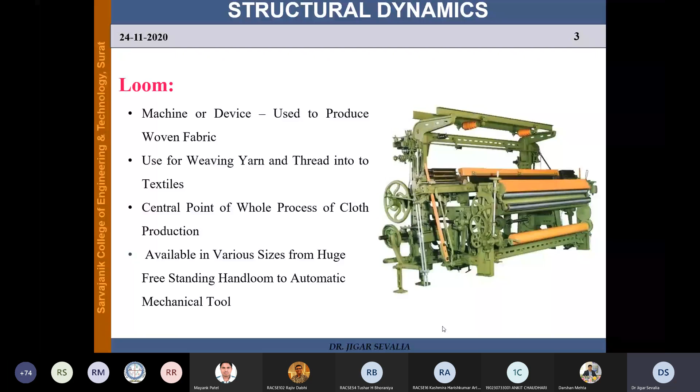It is available in various sizes, right from freestanding handloom to automatic mechanical tools. We have also seen handloom—all of you might have come across this handloom machine and automatic machine. As we are in Surat city, we are very much fortunate to have exposure to these machines. So when we talk of classification of loom, there are broadly two categories: handloom and power loom. We are mostly concerned about power loom because it is high speed machinery, so it creates more effect on the building in terms of vibration.

Going further in depth, handloom includes the vertical loom, pit loom, frame loom, chitranjan loom—these are the different categories of handloom. Power loom—conventional power loom—was very much common before. Right now also it is very much common, but people are now opting more for water jet machines and rapier machines, creating different types of...

So this conventional power loom machine we also come across in Surat city, and nowadays the proportion of water jet machines and rapier machines is also increasing a lot. So this is about classification of loom machines.

Now when we talk of dynamic analysis of the looms industry, structural analysis always considers two aspects: static component and dynamic component. In the static component, everything is steady state of load, gradually applied load, and it is not time dependent. So that is the static component—steady load, steady state of load, or gradually varying load, not time dependent. But when we talk of the dynamic component, it involves the motion of the particle, suddenly applied load, and it is time dependent. So we consider this component when we are talking of dynamic analysis of the looms industry.

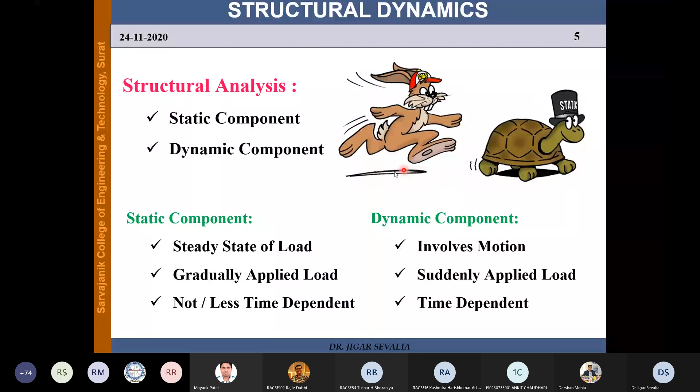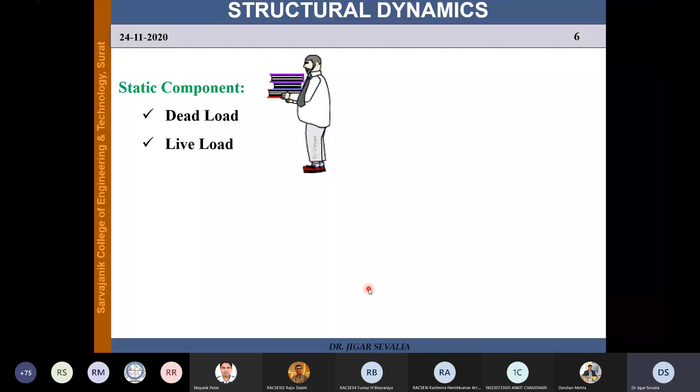So the static component will consider only dead load and live load, and it is very well mentioned in IS 875—dead load and live load—you can calculate from the available latest IS code, IS 875. The dynamic component involves motion, suddenly applied load, and machine vibrations like earthquake load, wind load, and blast loading. When we consider all this loading, we have to go for dynamic analysis. So that is about static and dynamic analysis.

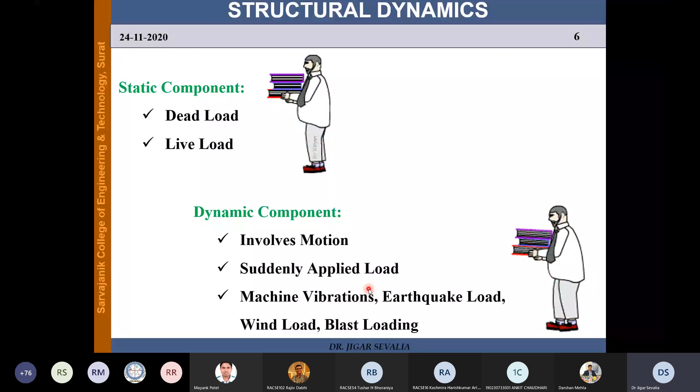And when we talk of structural response, what do we consider? Deformation behavior of the structure subjected to particular loading. I have experienced many times when visiting looms industries—you will feel vibrations.

When you are sitting on the chair, you can feel in a particular direction at a particular time you are getting certain vibrations. Even boxes which are there in the industry, you can see vibrating because it is the highest vibration creating machine in the textile industry.

So dynamic component, when we consider displacement, rotation, velocity, and acceleration, we are very much concerned about the acceleration part of the building, velocity, rotations, and displacement. These are the dynamic responses of the structure we are supposed to study while doing the analysis.

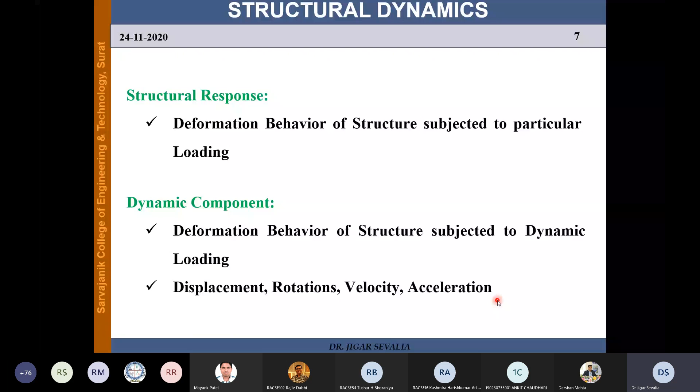So what are the important parameters for performing dynamic analysis? First one, whenever you do any dynamic analysis for industry, you must know the operational mechanism of the device, the machine, how it operates. Without knowing the machine...

Then we talk of natural frequency, resonance condition, tuned condition, deformation in terms of displacement and rotation, and vibration isolation. All these aspects I will cover in my presentation, except the last one. If time permits, I will go for vibration isolation also. I have a very good, excellent practical example of vibration isolation we are practicing in our Surat city, and what is the problem with that.

So this last component, I'm not sure about the timing, but above all these components which are necessary for dynamic analysis, we will go for that. So before starting, let us understand the operational mechanism of the device.

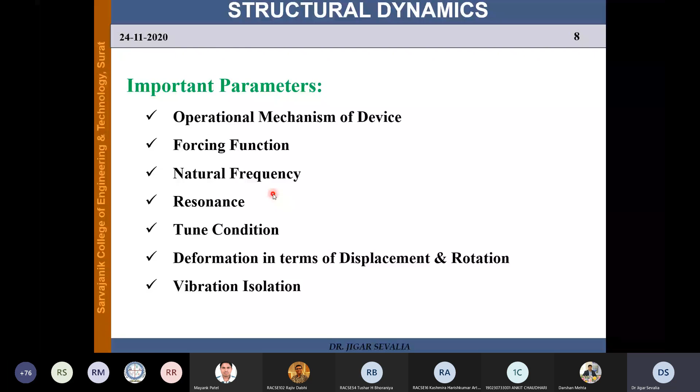So this is the actual photograph of the industry. You can see the machine, very small space is there for movement of the person. Most of the space, 90% space, is covered by machines. In a single row, there might be 6 machines. In this row, there might be 6 to 8 machines, and in this one also there will be 6 to 8 machines in a row.

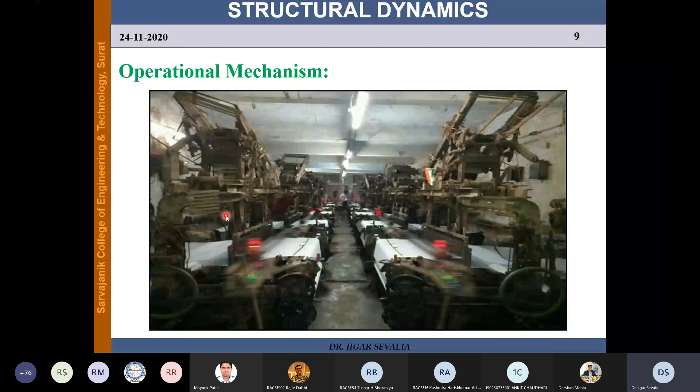So they are mounting about 12 to 16 looms, depending on the size of the industry, but there might be a minimum 12 to 16. So this is the actual photograph of the looms industry, and this is the machine we are installing. They are available from different manufacturing companies, different brands are available, but the simple operational mechanism is the same for all machines.

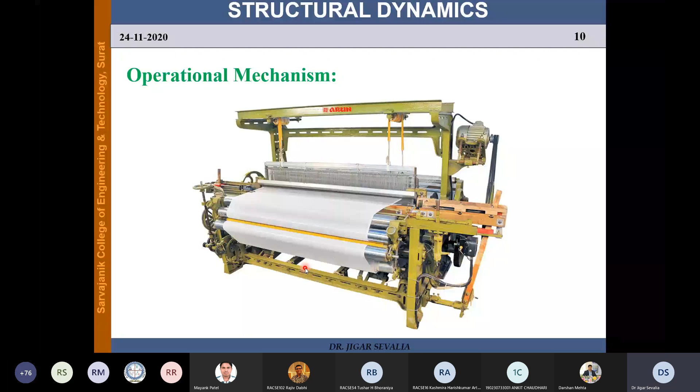This is our conventional power loom. Conventional, it is not water jet, it is not air jet. So this is actually the mechanism. There is a beam over here. Yarn is passing through all these components, and thereafter it gets separated into two different filaments, and there is a shuttle here.

So this part is the rotating part, what we call the lay. So what is the important component in dynamic analysis? Being a civil engineer, what is the component? The important component is the lay, which is moving forward and backward, and at the same time the heddle is moving up and down. The third component here, you can see the shuttle. I will later explain this in 3D also.

So lay is important, which is moving forward and backward. Heddle is important, just up and down, to make this filament up and down, yarn up and down. And the shuttle is for inserting the cross fiber, so that we can have a cloth piece ready over here. This is the raw material, yarn is available on this side. It will go through the process of heddle, lay, and shuttle, and we will have the finished cloth piece on this side.

So this is actually the process. The yarn is passing through this heddle. Heddle is moving, so reed is there. Shuttle motion is like this, and your lay motion is perpendicular. So this is reed motion. Reed and lay is one component, which is moving forward and backward, and shuttle motion is at right angle to that. Because of that, we have the finished cloth piece on this side.

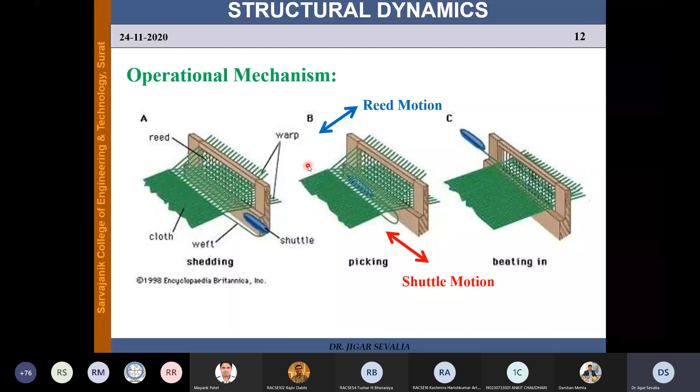Of course, the motion of the lay and motion of the shuttle is creating a lot of vibrations. So actually, reed motion is in this direction and shuttle motion is in plane. This is plan view. So these are the filaments which are coming from one end to another end, moving from one end to the other.

These are the two right angle motions of the component. Out of these two, reed motion is a much bulkier component, and hence it is inserting a lot more vibration issues compared to shuttle motion. The mass of the shuttle is very less compared to the mass of the reed, and hence the vibration created by motion of the reed is really important to study.

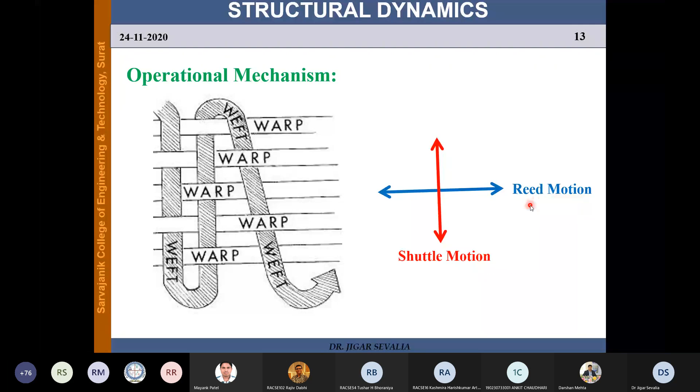So this is actually the process. The heddle, you can see, can move up and down. The shuttle is moving in this direction, and this lay, reed and lay component is moving forward and backward. So these are the three primary motions in the looms industry. Heddle is moving up and down, shuttle is moving along the length of the machine, and lay is moving across the length of the machine. So these are the three primary motions: vertical motion, motion along the length, and rotational motion about this point. So lay is moving forward and backward.

Out of these three, I told you the weight of the shuttle is very small, so it is not creating much problem of vibration. Even heddle is not creating any problem. The most important component is this one, the motion of the lay, which is moving forward and backward.

This forward and backward motion of the lay is creating a problem like this. When your lay is moving in this direction, it will provide push force over here and uplift force here. Push and uplift. So this leg will be under uplift and this leg will be under push condition when it is moving in this direction. When it moves in this direction, push and uplift. When it moves in the opposite direction, there will be a forward backward motion.

So when your lay is moving in anti-clockwise direction, there will be push on this side and uplift over here. What I mean to say is, because of forward and backward motion of the lay, your leg will be, in our technical term, alternately in compression and tension. So you can see this leg: when lay is moving in clockwise direction, it is under uplift condition; when it is moving in anti-clockwise direction, it is in push condition. So compression, tension, alternate forces are developing under the leg.

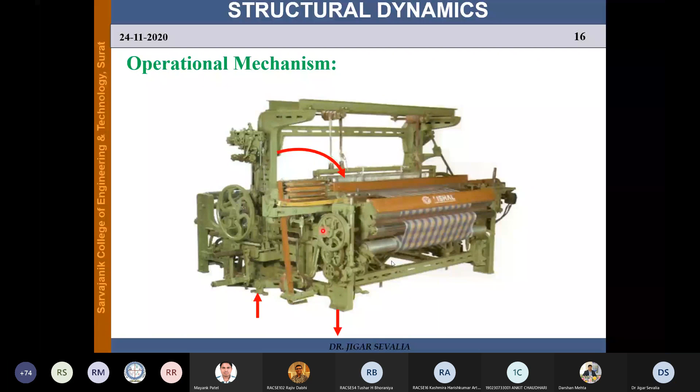That is the operational mechanism of the looms machine, and we are worried about this motion of the machine. So this is push and uplift, alternating. Okay, so that is what we understood about the operational mechanism of the looms machine.

Now, what is the effect of operation of the machine on the building? Can you please let me know what the effect of this machine operation on the building will be? What does it create actually? Anyone? Vibrations. Vibration, definitely. We are very much worried about vibration.

So your building is deforming because of such operation of the machine. It will move left to right. Even with the operation of the machine, with the operation of lay forward and backward, it will push the building also forward and backward. So you will observe vibration.

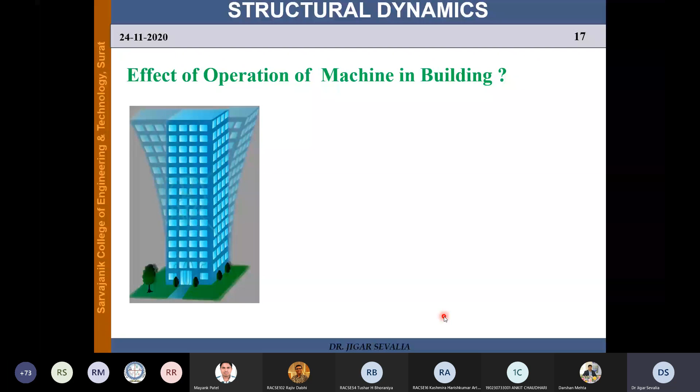Is it good or bad? Vibration, is it good or bad? Definitely in this application. Yes, yes. Anyone? Sorry sir, repeat, is this vibration good or bad? If it is bad, sir, under natural frequency then it is okay.

Otherwise it is bad. See, this vibration is always bad. I will share my experience with you on whether it is under resonance condition or not. We will see later if it matches with the frequency. You rightly answered that if it matches with the frequency, it is problematic.

But any kind of vibration, if you see in the building... I have seen old buildings which were constructed in good condition, where because they were under vibration over a period of time, over 20 to 25 years, it has broken down the bond between different particles of concrete, meaning coarse aggregate, fine aggregate, and cement. Cement gel is bonding your fine aggregate with the coarse aggregate, and these vibrations are always trying to break down this bond, and the building is slowly weakening.

Building is slowly weakening, that is the bad part of it, vibration. So it is actually an undesirable activity in the building. It is creating undesirable... yes, please mute your mic, please. Someone.

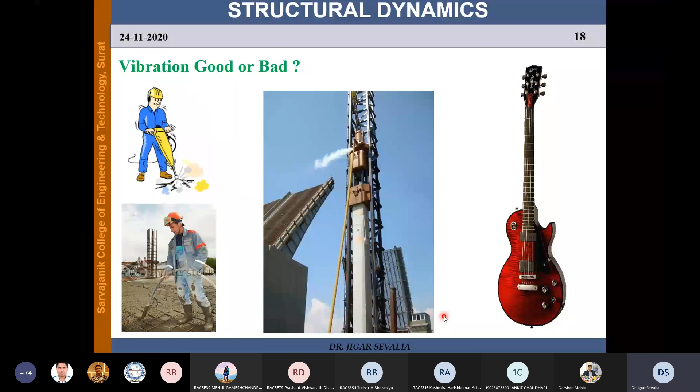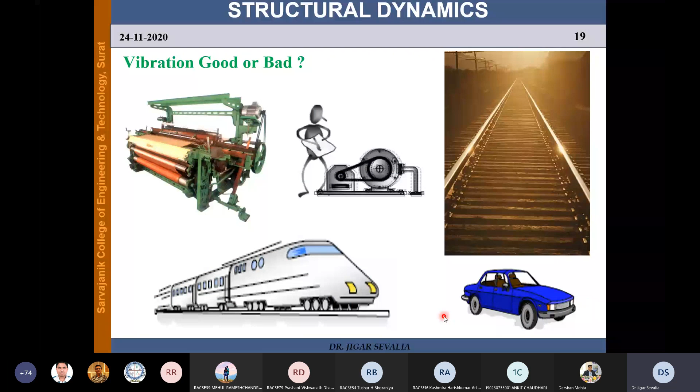So for this application, it is an undesirable activity. But some good applications, like breaker machines, we use vibration for demolition of buildings, compaction of concrete, pile driving, even guitars use vibration to achieve their function. These are the bad applications. When adjoining there is a railway track, the motion of the train creates vibration in the building. So these are some applications where we feel vibration is harmful to the building.

So vibration and oscillation, what is the basic difference? Vibration deforms the building - you will see deformation in the building, whereas in oscillation there will be a rigid body motion. You will not be able to see deformation in the component of the building. But vibration means there will be a geometric deformation of the building. That is the basic difference.

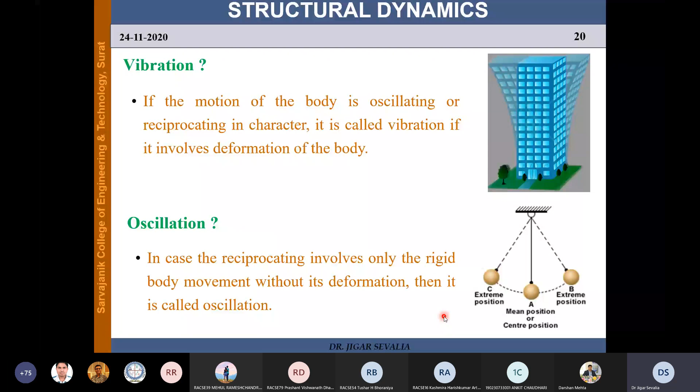The lay reed moves forward and backward. There is nothing to balance that motion. And when there is an unbalanced mass moving in the machine, it will create vibration in the building. Why does it create vibration? Because your machine is firmly attached with the floor of the building. So this forward and backward motion of the reed or lay, which is unbalanced, creates vibration in the machine, and the same vibration we feel in the building also.

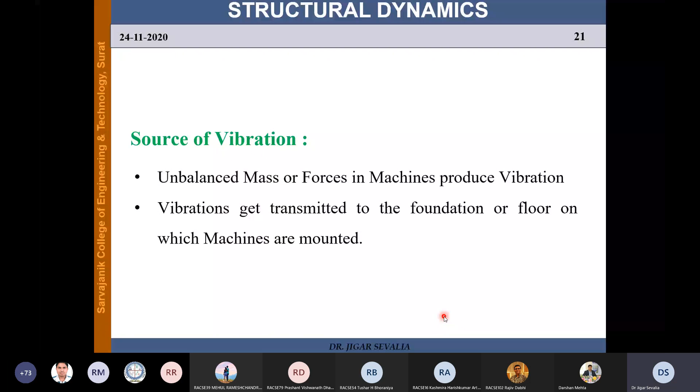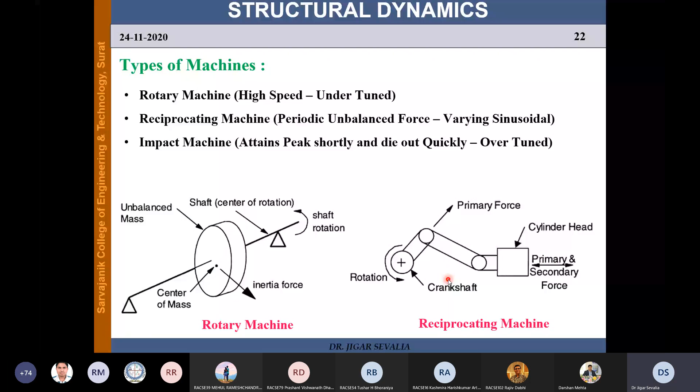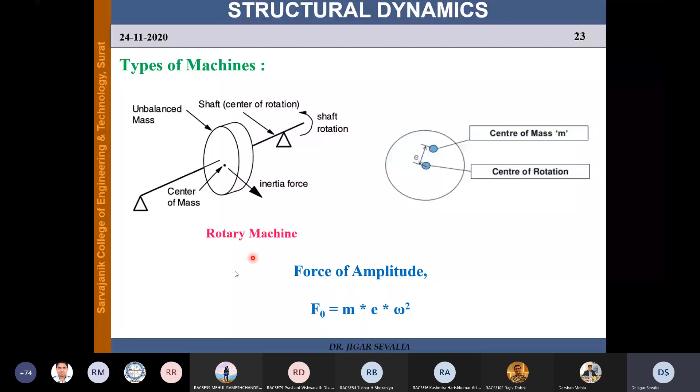And how do we calculate unbalanced force? In case of rotary machine, we find the force amplitude F0 equals m e omega square, where m is mass, e is eccentricity, and omega is the circular frequency with which the machine is rotating. That is F0, force amplitude in case of rotary machine.

Similarly for reciprocating machine we can calculate, where this mass is moving forward and backward because of rotation of the rotational component. Here the lay is also moving forward and backward in our loom machine because of some rotary component of the machine. So this mass moving forward and backward produces primary and secondary force.

So how do we calculate primary force and secondary force? M omega square r cos theta and cos 2theta upon n. We will not go much into derivation of this, because I want to give you practical application of how we can analyze the loom industry using software. So that is how we calculate force components. Why do we require these equations? Because we want to define the forcing function which can be utilized for analysis purposes, and this will help in finding forcing functions for analyzing the loom industry.

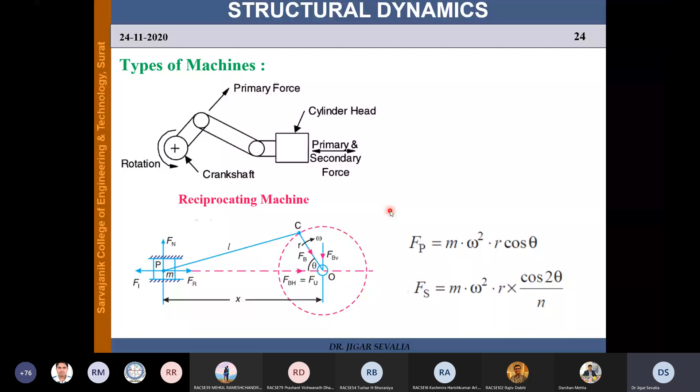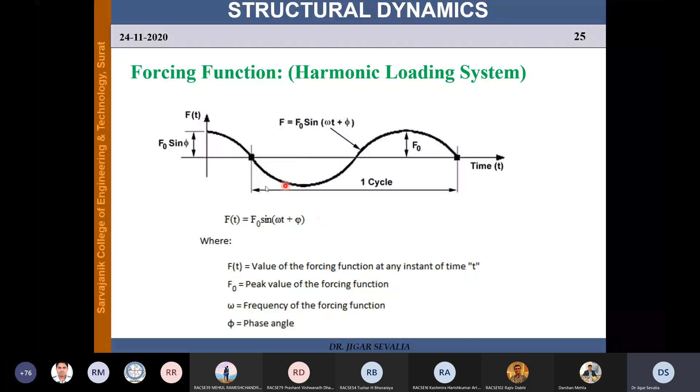So this is basically your forcing function, F t, force at any time equals F0 sine omega t plus phi. This F0 is nothing but the forcing function, the peak value of the forcing function. The force can be calculated using this formula, with omega t plus phi, where phi is the phase angle. The phase angle is useful in this analysis because we have multiple machines on a single floor, so phase angle is important for such analysis. So this is how we derive the forcing function for the loom industry.

Now, one more concept we need, that is frequency: the number of cycles or vibrations undergone by the body during one unit of time during periodic motion. That is the basic definition of frequency.

When we talk of natural frequency, it is the frequency at which the system will oscillate without action of external force. There will not be any external force. Of course, we require some initial force to disturb the body, but after removal of the force, it will go on vibrating. So how many vibrations occur? The frequency at which the system will oscillate unaffected by outside force.

We find out this natural frequency using the equation 1 upon 2 pi under root k by m. This is the formula we use for finding the frequency. Stiffness depends on the size of the structural component, and that's why natural frequency can be altered by changing the size or mass in the system. So natural frequency depends on stiffness and mass of the system.

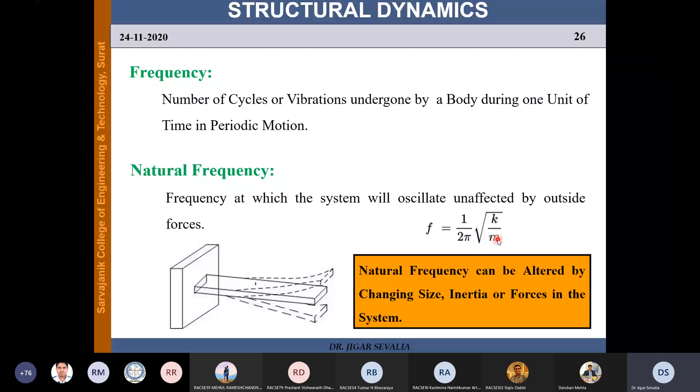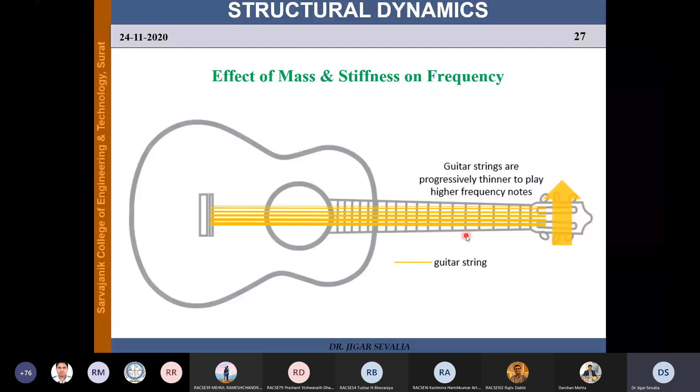And forcing frequency: when the body is in contact with an external source, there is always an external source of vibration. Just like in the looms industry, there is a machine inside continuously imparting force on the building, and under the action of that force, the building is vibrating. That is called forcing frequency.

And the resonance condition: it is just the matching of two different frequencies, natural frequency and forcing frequency, both matching with each other. For example, your machine frequency is 3, and your structure is also having frequency 3. Both are matching, exact matching. Then it will create the resonance condition.

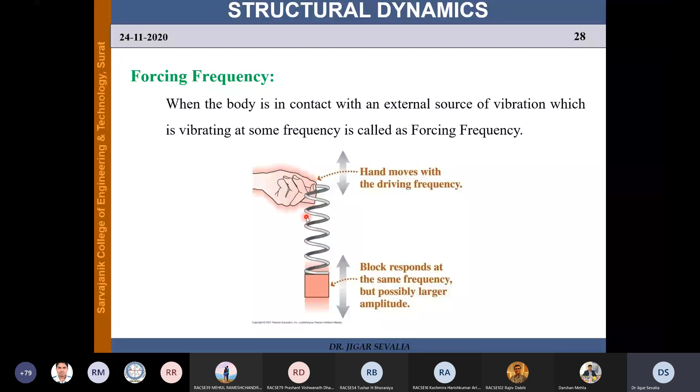When both frequencies are matching, it is actually additive, addition of frequency. What does that mean? Both bodies are moving in the same direction. For example, this mass is moving in the downward direction, and at the same time this hand and this mass both have the same frequency: 3 and 3. Both are matching with each other. So when the hand goes down, this mass will also go down, and when the hand goes up, the mass will go up. So both bodies are moving in the same direction, and when both move in the same direction, there is an addition effect. Addition effect means exaggeration, displacement will get exaggerated. That is the effect of resonance.

Yes, sir. Yes, sir. Okay, okay, fine.

So that is what about resonance condition. Now, tune condition - based on this resonance condition, we come out with two different types of foundation, and that is called tune condition. Foundation type is the relative situation of forcing frequency and natural frequency.

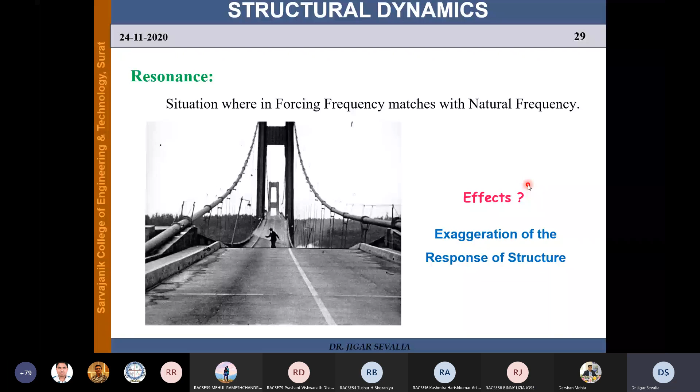Now what is this foundation type? Either we go for undertune and overtune foundation. The problem we are suffering in our looms industry is because of undertune condition - overtune condition and undertune condition. So what is it? It is just a relation between two frequencies: the frequency of the structure and the frequency of the machine.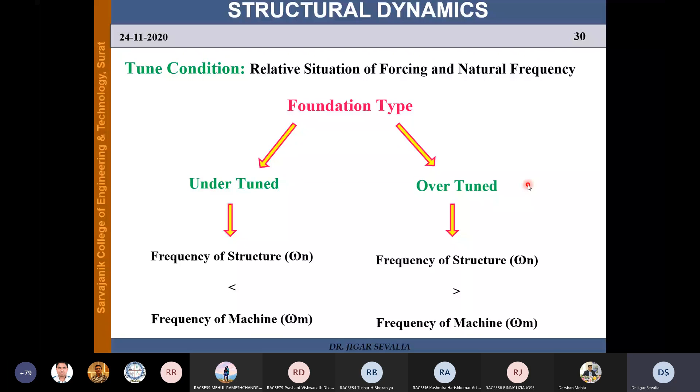When natural frequency of the structure is less than machine frequency, it is called undertune, and overtune is when the frequency of structure is more than frequency of the machine. It is highly desirable that frequency of structure is more than frequency of machine. But what is the problem with that?

If you want to make the frequency of structure more, you need to make the building more stiff, and then you can get more frequency. You know frequency equals 1/2 pi under root k by m. So if you increase the stiffness of the building, then you can get more frequency.

Now, stiffness depends on mass of the building, so you need to add more and more mass in the building - make the size of the structural elements larger so it can have more stiffness and more frequency. So it will result in an uneconomical solution.

So many times this undertune foundation is desirable because frequency of structure is less than machine frequency, and we can make the structure lighter in context of economy. Size of the structural element will be smaller, but the problem of vibration will be there. So we have to overcome both - we want to avoid vibration also, and we want to achieve economy also, being a structural engineer. So that is the difficult part of this analysis.

So the foundation type, basically undertune, depends on relative frequency of machine and structure.

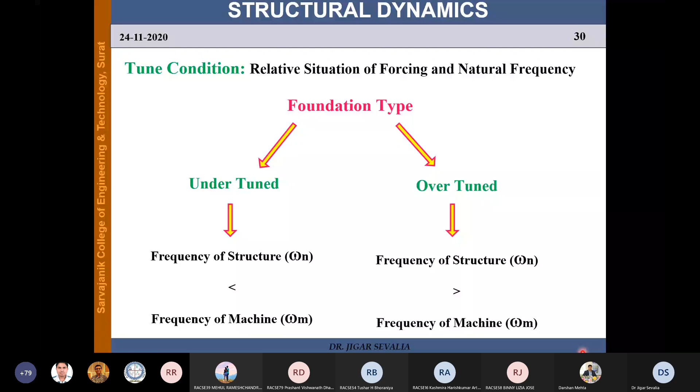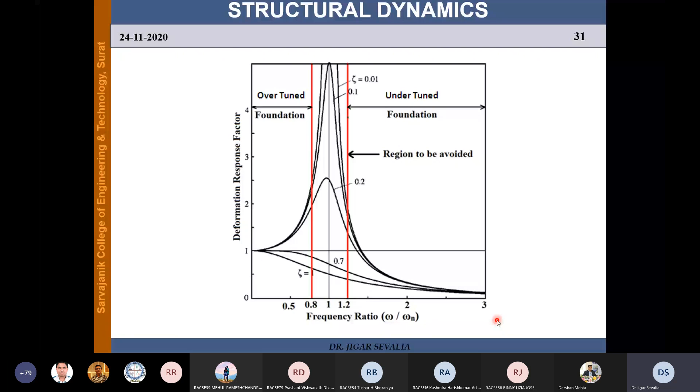So that is the understanding of this graph - the basic difference is your machine frequency should differ from natural frequency of the building by 20%, either less or more. So this is undertune and overtune, what we discussed about. Now what happens in undertune condition and what happens in overtune condition? We understood the difference of this.

Undertune means your building frequency is less than machine frequency. Now what happens? Suppose your building frequency is 2 hertz and your machine frequency is 3 hertz. Then what happens? When your machine achieves full frequency of 3, going from 0 to 3, it has to cross the value of 2. When your machine is not in running condition, it is in switch-off mode. When you switch on your machine, it will start from 0 and it will achieve a frequency of 3.

From 0 to 3 frequency, it has to pass the frequency of building, which is 2. When it passes frequency of building 2, what happens? There will be a resonance condition, so you will feel some vibration in the building. That is the undertune condition. So displacement increases with the increase in frequency, that is what it means.

0, 0.5, 1, 1.5, 2. Now 2 frequency of machine matched with the building frequency. Now what happens? You will see displacement increase, exaggeration in the response of the building. Thereafter 2 to 2.5 and 3, so for some time there will be a resonance condition and you'll feel some vibration. That is what undertune foundation.

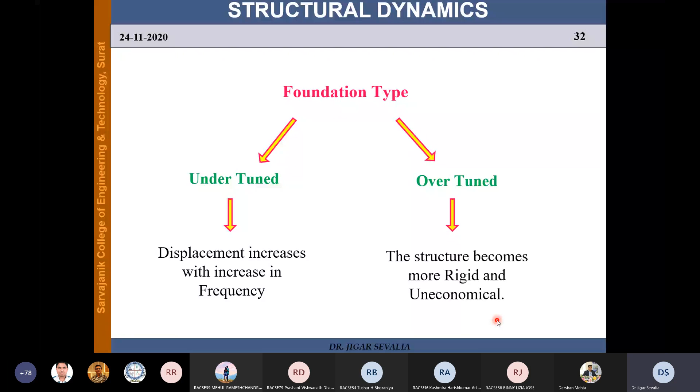This is one experience given by a client: when your building is vibrating much, their laborers are not able to work properly because there's vibration of the building and vibration of the machine, and you want to do accurate work on the machine. The laborers suffer problems, they are not able to work properly, and a little disturbance in the body may create accidents, because the majority of the part in this looms machine is a rotating part. So if somewhere you miss out on accuracy, you may come across an accident. That is the issue.

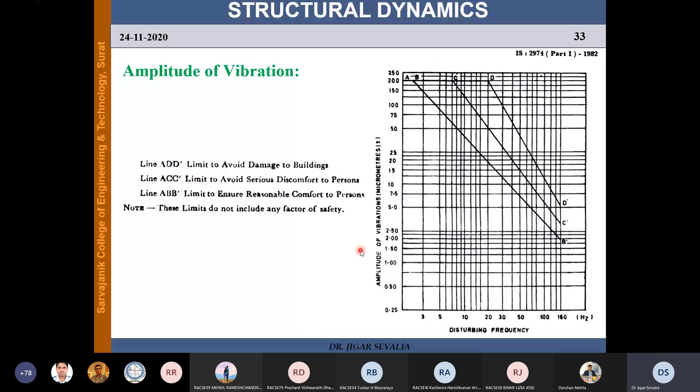So this looms machine, I told you, multiple machines we are housing in the building, and that is why it is really very tough to create different analysis files for this building. It is not like a single machine; if it is a single machine it is easy to analyze, but multiple machines will have different performance at different moments, and you want to club that in the analysis. Really a very tough job. But with the help of software it is now possible, though you still have to create multiple files for multiple combinations.

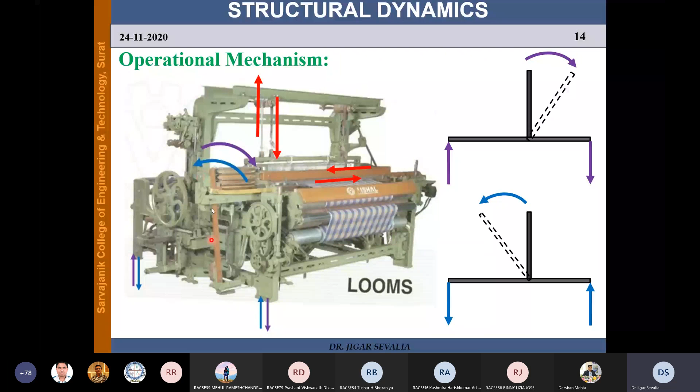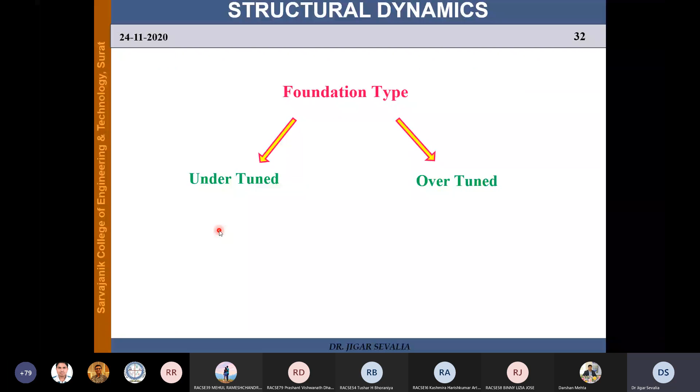Forward and backward, that's what I'm asking. When this lay is moving forward and backward, what will happen to the building? All these 7 machines are having lay motion in backward direction, and all these 7 machines are having lay motion in forward direction. These 7 are having counterclockwise motion, and these 7 are having clockwise motion. What happened? These 7 machines will force the building to the right, and these 7 machines force the building to the left.

What happened when left hand side 7 machines force building to the left? It is balanced, yes, it will be under balanced condition. But who will control this? No one can control this. Ideally, we cannot tell the labor that 7 machines at a time have to run to the left, and this 7 machines you have to run to the right. There is no control over it.

What happened when all the machines are having lay motion in a particular direction, either counterclockwise or clockwise? In that condition, the building will be tilted. Vibration created, maximum vibration you will feel, either to the left or to the right.

But one more situation I would like to tell you, one more situation I would like to ask you. This is the central part of the building. All these 6 machines are having counterclockwise motion to the left, and these 6 machines are having clockwise motion. Then that also is balanced. These six machines are having lay motion in counterclockwise direction, and these 6 machines are having lay motion in clockwise direction.

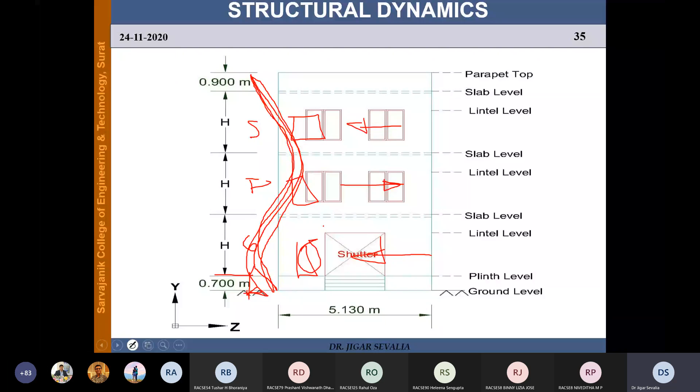This is the work done by one of my UG project student groups. So what information is needed for this building? We require size of the column, beam size, floor height, slab thickness - all these structural parameters we need. What should be the thickness of the slab, floor height, longitudinal beam size.

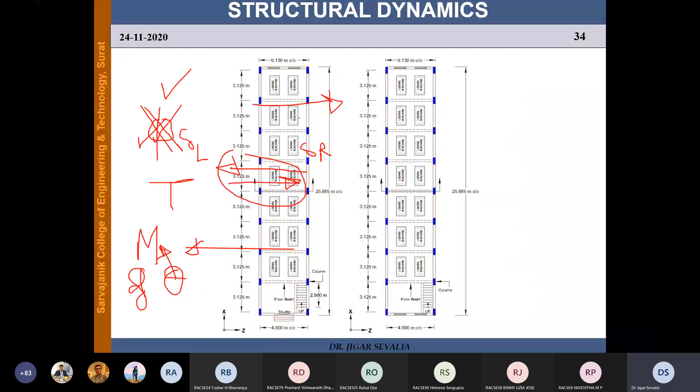When I talk of this beam, we have two beams. One is the longitudinal beam, and these are across the length of the building. These are the different beams. So both beams require longitudinal beam size, cross beam size, column size, height of the floor, and slab thickness.

We require material parameters - modulus of elasticity, since we are dealing with vibration, Poisson's ratio, density, and coefficient of thermal expansion. We are not adding layer of expansion and contraction here. These are the default parameters needed in software.

Machine data you require - this you can bring from the machine manufacturer. Size of the machine, operating speed. All machines have different speeds, so you must know what the speed of the machine should be.

Nowadays it is very difficult as we are in transition mode. I have seen many customers switching over from conventional loom machines to rapier machines and water jet machines. When you change the machine, frequency changes, weight changes. So how will that building perform under that condition - no one is taking care of that. I'm sure no client has asked the engineer whether the building will survive when installing different machines, switching from conventional loom to water jet machine.

We need to perform analysis again and justify the dimension of this lay, mass of this lay, and operating frequency. So all this data - dimension of the lay, that is reed and lay actually, mass of this lay - why do we require this lay mass and dimension? Because we want to find out the forcing frequency.

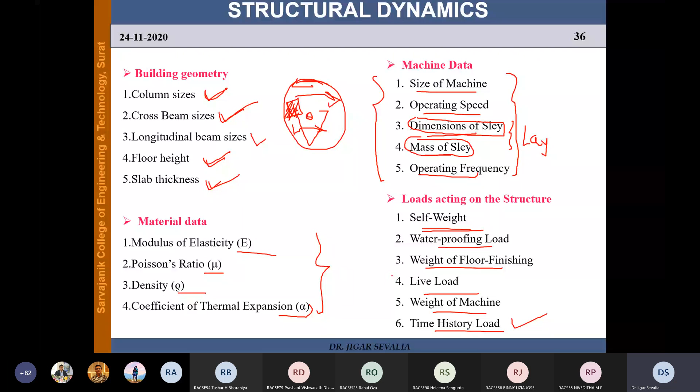And of course, weight of the machine - this loom machine weighs from 1500 to 2000 kg, that is 1.5 to 2 tons. Waterproofing load and all these are the conventional loads we consider, as in a normal building, floor finish weight, etc.

I would like to share one practical experience I came through. One practice started in the past - what people were doing after casting of the slab, they were installing kota stone flooring, and on that flooring they were installing the machine. So on the cast slab they would lay the flooring, and thereafter install the machine. But in between an era, some advanced development in concrete came about - people were using vacuum process.

Vacuum process - what happened is it gives you a slab surface so finished that you need not do flooring on it. They give such a good finished surface of the slab, so this is a great advantage for the client - we are able to save the cost of the flooring. That is an added advantage.

So the client accepted this, and they started installing the loom machine directly on the slab without a layer of flooring in between. If you go to any old building, 20 or 30 years old, you will see there's a slab above, there's a kota stone floor, and above that the machine - versus now floor finish directly on concrete using vacuum concrete.

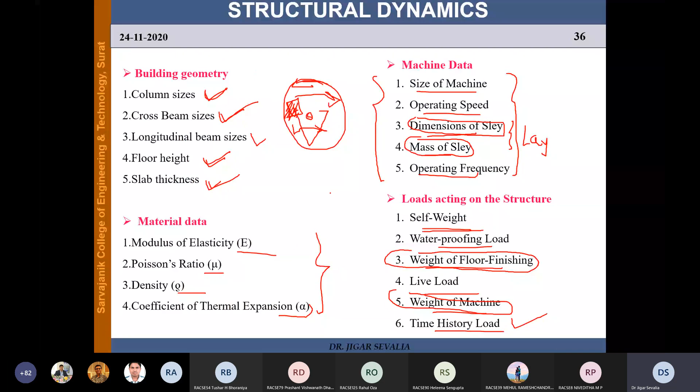Your machine frequency is 2.67, which we calculated. This is the operating frequency of the machine, 2.67. Mass of this lay, which was 15 kg, dimension of this lay, operating speed of the machine 160 rpm, and this is the size of the machine. So all this data we could get from the machine manufacturer.

They provided us this, but they are also not very much aware about it. We have to visit their manufacturing unit and measure the different elements ourselves. This data will not be available readily; you have to get it calculated.

So this is what data you can get from the manufacturer, and these are the default data, live load we consider as 2. Now you must be asking, if it is an industrial machine, why is the live load only 2? Because I am considering all the machine data separately. So I am not much concerned with the other load mentioned in the IS code, which is 4 or 5, for live load. You know the maximum space covered by the machine, and the machine weight I am considering separately.

The forcing frequency and the force exerted by the machine I'm considering separately, so there's no need to consider that again. I'm considering only the live load where laborers are moving, the area on which the laborers move, and the weight of the machine.

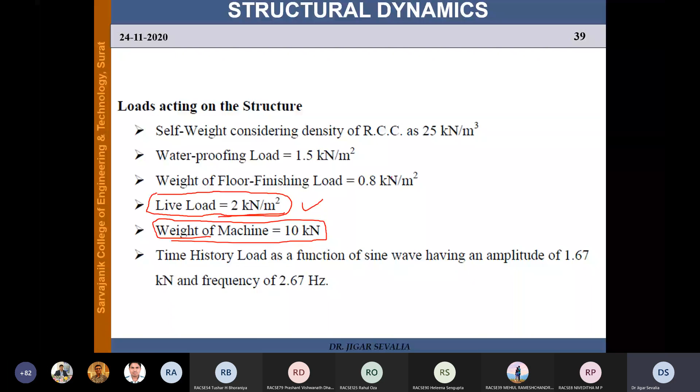So what we must take care of is 0.8 into 2.67 and 1.2 into 2.67. Your building's natural frequency value must not fall in this range. 0.8 multiplied by 2.67 is about 2.13, and 1.2 into 2.67 is about 3.2. I don't know the exact value.

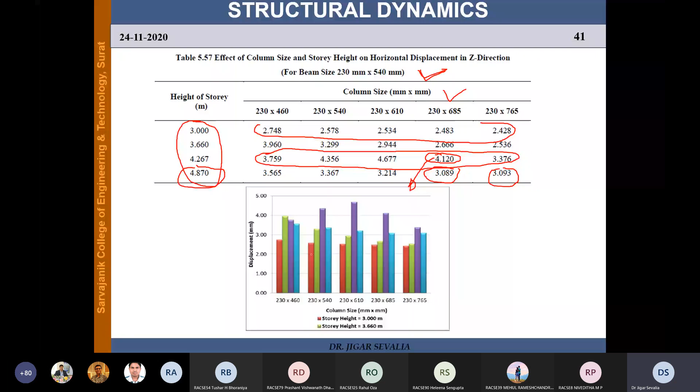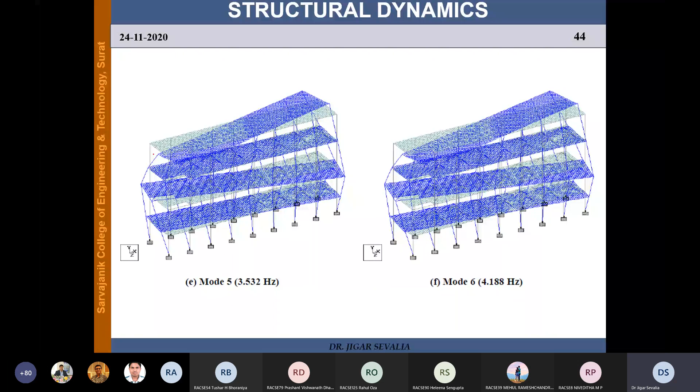We normally assume that corner columns are very lightly loaded in static analysis, but in dynamic analysis you can see the bending or twisting of the corner columns. In static condition, very low responsibility, but in dynamic analysis it has got major responsibility.

Another remedial measure: full length jacketing of the column, right from foundation to top of terrace slab. But in that case, we have to excavate the ground, and sometimes your client may not permit that. So what we do is partial length jacketing above plinth level, not below plinth level. These are some options we can analyze with software.

We also try to provide haunches at the beam-column junction, and we also provide tie beams. All these elements are of steel, ISMB maybe 150 or 200 depending on your design. We cannot do anything below plinth level, but we can provide a tie beam at the lintel level. This is also one option we tried.

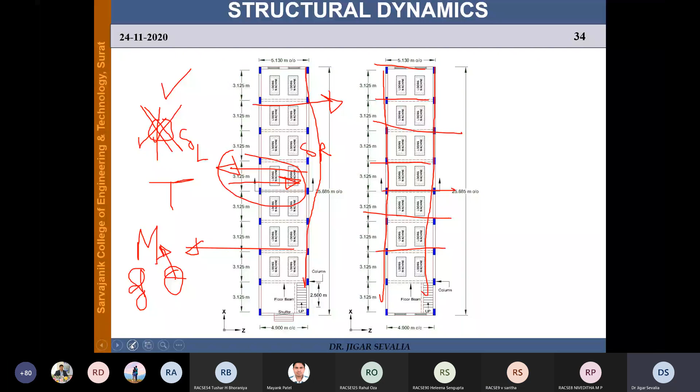Okay, because there is a practical tragedy here. Let me show you the plan again. In this, you can see your machine is vibrating in this direction, and in that direction we have minimum size of the column available. This practical issue we are not able to solve. Actually, your orientation of column must be like this.

Your orientation of column must be like this, because your machine is vibrating in this direction, and in this direction the strength of the column is larger. But practically on site this is not possible. You have to orient the column always perpendicular to the major vibration created by the machine. That is a practical issue we are not able to resolve.

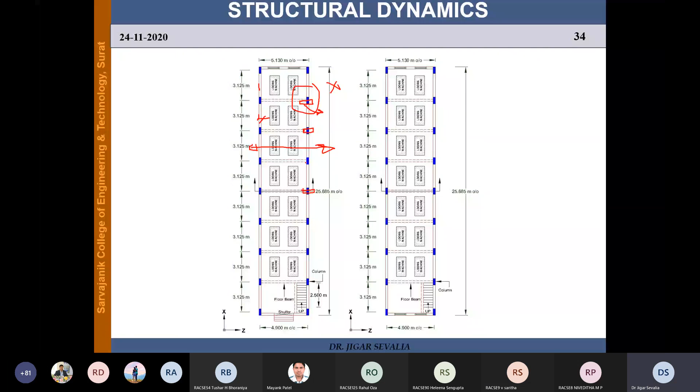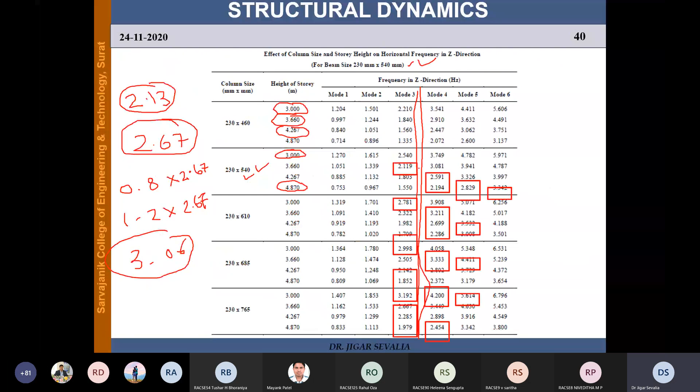But if you do jacketing all around it, this being the existing column, and you provide 3-inch jacketing just like we do in repair, rehabilitation and retrofitting, this helps a lot in improving the performance of the structure. But it requires a lot of effort from the client also, because we are going in an existing building below plinth level, so we have to excavate, and a lot of expenses are involved. So out of all these options, full length jacketing is far better.

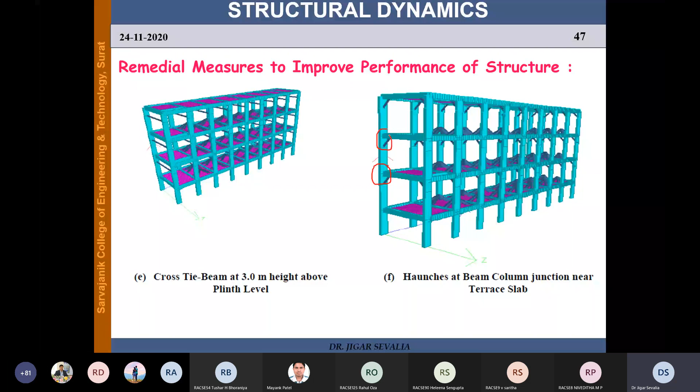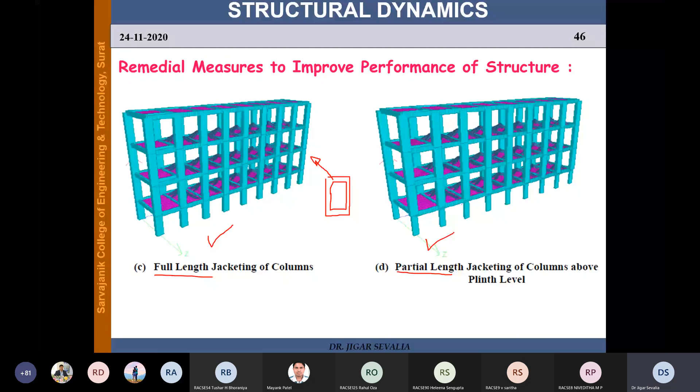Second is partial length jacketing. Third one is haunches. When we provide a haunch, this is a much better option because it improves the performance of the beam-column junction. So the third better option is haunch. The fourth one is cross tie beam above plinth level, and tie beam is last. So the very first option is full length jacketing, second is partial length, third is haunch, fourth is cross tie above plinth level, and the fifth is tie beam provided at the lintel level. So this is the study we did at that time, and this gives the better option. This was the finding of this work.

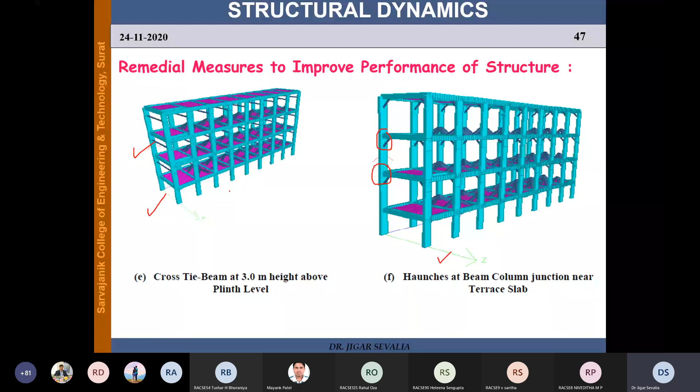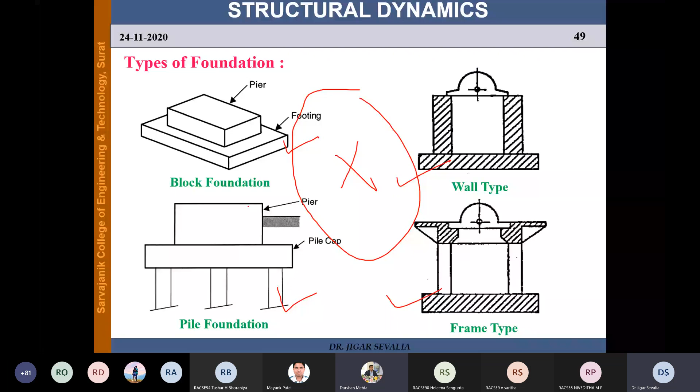One component I talked about is isolation also. Darshan sir, is time permitting us to go ahead? Yes sir, till 11:45. Okay fine, so I can cover this vibration isolation topic also, it is very interesting. In the looms industry, you will see that they are introducing one element in between the machine and the floor.

That is called vibration isolating material. It is essential to isolate the machine from the foundation so that the surrounding structure is not affected by the vibration. So such a mechanism we have to install. But in our looms industry, we are not installing springs, they are installing rubber pads or some material they call NAMDA, which is installed below the leg of the machine.

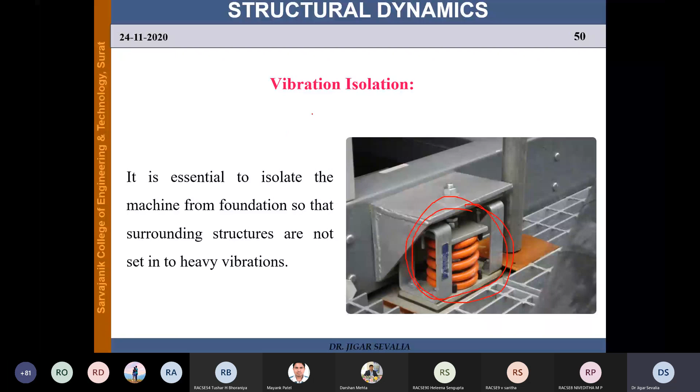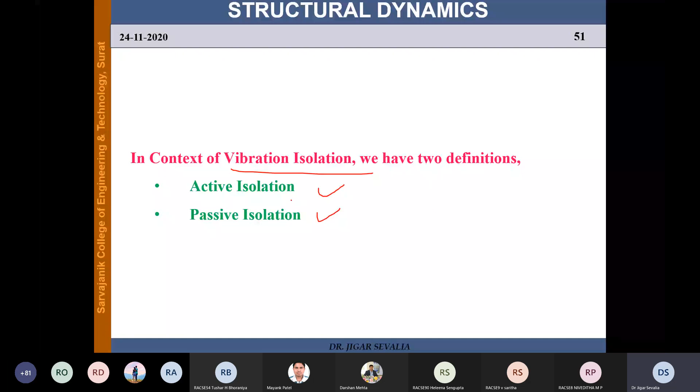So why do we do vibration isolation? There are 2 types: active isolation and passive isolation. Active isolation means we are stopping the transmission of vibration from the source only, and passive means we are protecting something. This is active isolation: we provide a trench on all 4 sides of the machine so that the vibration will not get transmitted to the adjoining structure.

This is prevention at the source, and this is curing. This machine we want to protect, so we are providing a trench so that the vibration developed by the surrounding instruments will not reach it. This is called passive isolation. This machine is not creating any problem, adjoining machines are creating the problem, so we are protecting it.

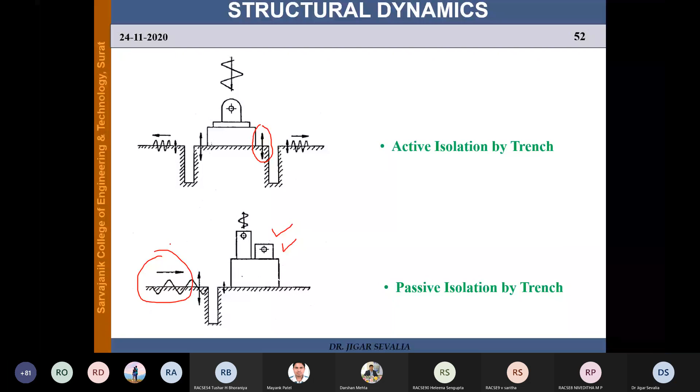So it is passive isolation. This is source isolation and active isolation, which are different names: shielding isolation and source isolation. Source is active, shielding is passive.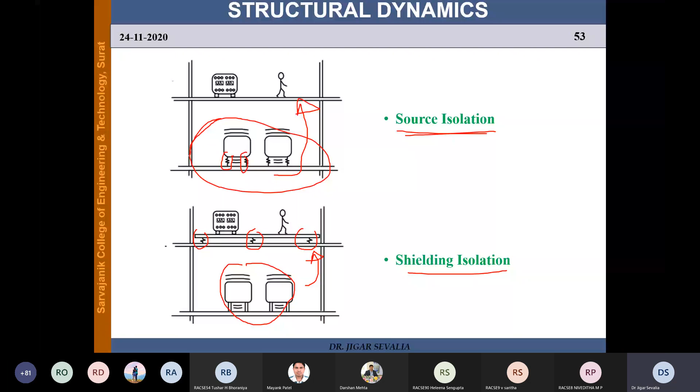And this is active isolation. Most of the time we are doing active isolation. So this is what we are doing actually, what we are doing physically, practically on site.

Machine leg directly fixed with the floor. You can see 4 bolts, 1, 2, 3, and 4, somewhere on the back side. So now what happened?

You can see there is no isolating material in between. Your machine leg is directly connected with the floor, directly connected with the floor. If the machine is rigidly connected with the floor, the vibratory movement of the machine itself may be reduced.

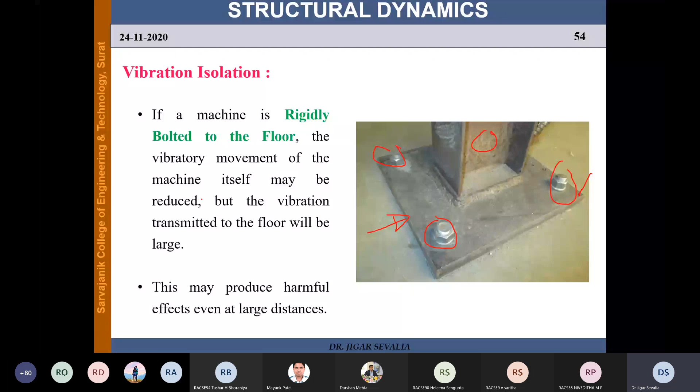So now what if you introduce a flexible support? Vibration transmitted to the building will reduce, but your machine itself will vibrate more, and it may disturb the labor operating on it, because with this flexible support, you can imagine yourself standing on a spring.

You can imagine yourself standing on a spring, or you can imagine our train bogie, which is supported on a spring. Your wheel is moving firmly on the track, and the bogie is moving, the coach is moving. It is vibrating a lot.

Why is the coach vibrating a lot? Because it is mounted on a spring. It is mounted on a spring. It means that your train wheel will remain firmly connected with the track. There will not be any disturbance.

But the people sitting in the coach will feel vibration a lot because there's a flexible spring support between the wheel and the coach. The similar condition is here: this flexible support helps prevent transmission of vibration, but your machine is vibrating a lot, which is not a good condition for the labor working on it. So what we are supposed to do is compromise in between.

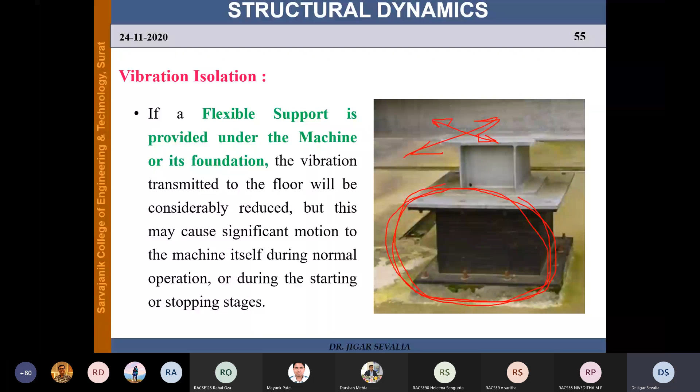Your machine should also not vibrate much, and your building should also not vibrate much. So that is what we call a compromise between these two. We must develop some compromise between these two requirements, and that is what we do in power looms, in the context of power loom machines.

This diagram is given in the book by Srinivasulu and Vaidyanathan, in the book on machine foundations. An excellent diagram is given there. You can see the machine leg; this machine leg is supported by...

the pad below. You can see a rubber block. Also, there's a rubber block here. There's a rubber block here, and also there is a washer, a rubber washer. You can see number 5, the rubber sleeve.

This is the rubber sleeve. It means that the leg of the machine is not directly in contact with any component. Everywhere there's rubber material. Rubber and rubber sleeve. Not a single part of the leg is directly connected.

Even the connection with the bolt is also separated. It is separated by using rubber sleeve, rubber pad. What does it mean? Whenever vibration arises from the machine through the leg, it will not directly come in contact with any rigid material, say bolt or floor. It has to pass through rubber material.

And when it has to pass through rubber material, there will be vibration absorption, vibration damping, and not much vibration will get transmitted to the floor. So this is very typical, and the execution on site must be like this only. But unfortunately, execution on site is not happening this way. That is the reality I have seen on site.

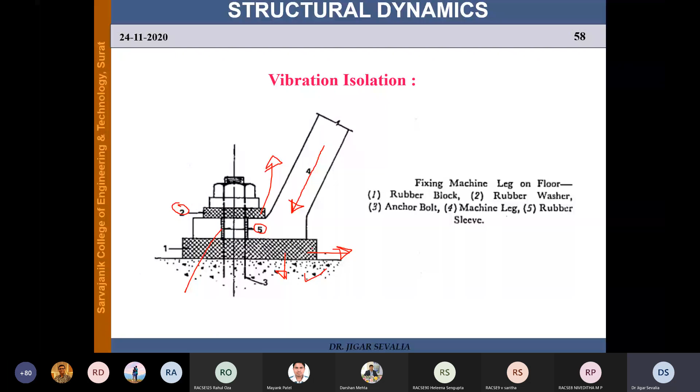So I will show you a practical diagram. This is one of the diagrams. You can see a live photograph of the machine, the Looms machine installed. What are you able to see? What is this? This component I am talking about.

What is it made up of? How does it look? Wood material. It is one of the materials for absorbing vibration, but this is the wrong application in case of the looms industry, because when this loom is operating, whatever vibration is created, the wood material is not soft enough to absorb it. So here it will just act as a transmitting medium, nothing else.

It will act as a transmitting medium, nothing else. It will not absorb, definitely. Because when it absorbs, say your bike, when it is able to absorb the vibration, when the jumper of the bike is able to compress, then some energy will get consumed in compressing the jumper and it will not come to you.

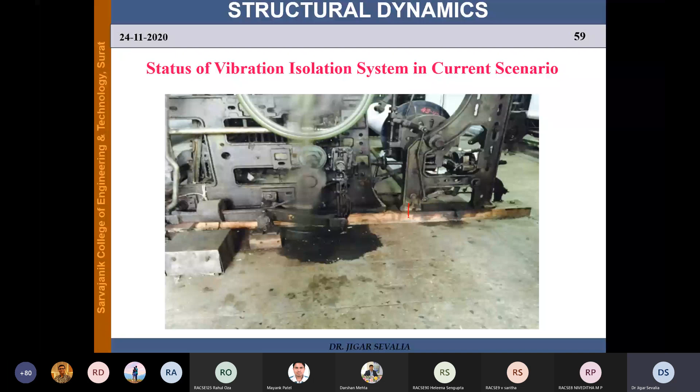That is the performance of the jumper. The same thing here. The weight of the machine's vibration is not able to compress the wooden or timber material. How will it absorb? It is just acting as a transmitting medium. Then another application, this, okay.

Vibration isolation material, never. Your floor is made up of concrete. This component is made up of concrete. So it will not help you at all.

So these are the mistakes you will see, because they are not appointing any engineer. They are just manufacturing, the client is just buying from the manufacturer, and they are just installing it on the site. What happens after some days, some months, or after 1 year, they come across this difficulty of vibration. They call upon a structural engineer saying we are feeling vibration. When you go to the site, you see the condition is like this. So that is the unfortunate part of this.

Also you are able to see a lot of spilling of the oil. I have seen they have one expert for the machine. Every looms industry has an expert for the machine so they can solve the problem on occurrence. And he is always working with that oil kupki, as we say. Whenever there is some noise, they just fill up the oil, adding excessive oil to the machine. Now what happens? The excessive oil comes onto the floor.

Now why am I showing this to you? Because it has importance. Can you guess why I'm showing this oil to you? Anyone can guess? Spilling of the oil, it is not the oil, everywhere you can see. Extra oil they just used in the machine. Fine, I will tell you.

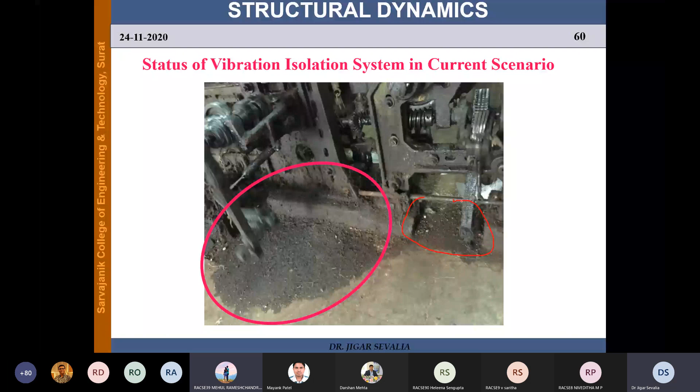So these are the vibration isolating materials they are using. This they are calling NAMDA, just calling it NAMDA - their language, I don't know, that is the language of the clients - and this is rubber pad, more commonly available nowadays.

So these two different materials they are using below the leg of the machine. There is no problem with this material, but many people are using that other material. Now what is the problem with that material? Now how does the vibration isolating system work?

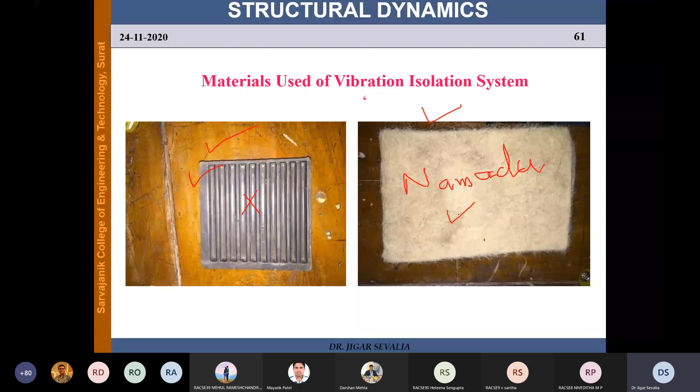Let me show you. So this is the leg of the machine. This is NAMDA, what I told you, they are providing below, and a wooden block. So these two systems they are using, wooden block and NAMDA. These two components are added below the leg of the machine, and thereafter bolting is done directly to the slab. You can see this bolt is directly anchored into the slab and not over here. So they are just fixing it. This is the mechanism you are able to see in almost all looms industries.

Now what happens here? When push - earlier I explained to you the push and pull effect.

So when there's a push effect like this, when leg is pushing, there's a resisting force acting on the NAMDA, force distributed on the isolating material. Under this action of force, your NAMDA will compress, and it will help you in damping out the vibration.

But what happens when there's an uplift force, like this? Do you think NAMDA will be helpful to you in absorbing vibration? No, because of this uplift, the gap between these two will increase, and when the gap increases, your NAMDA is not effective at all.

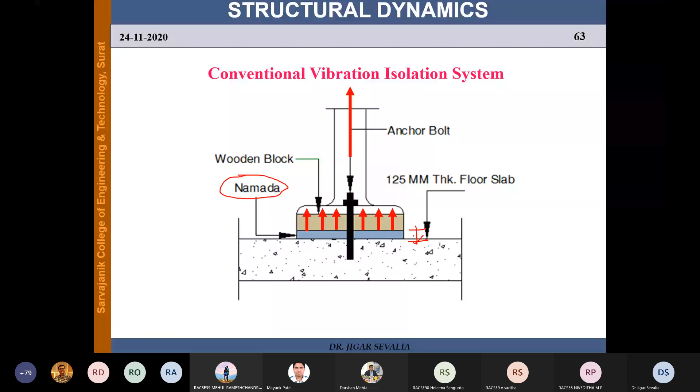Instead, what is happening? Because of this uplift force, this bolt will get uplifted, and this bolt is connected directly to the slab. So in case of uplift, your vibration is directly connected with the slab.

Only in push effect is your Namada effective, not in uplift effect. That is what I wanted to show you. So this bolt will be under tension and will transmit force directly to the slab, because it is connected to the slab. It means your slab is now under loaded condition.

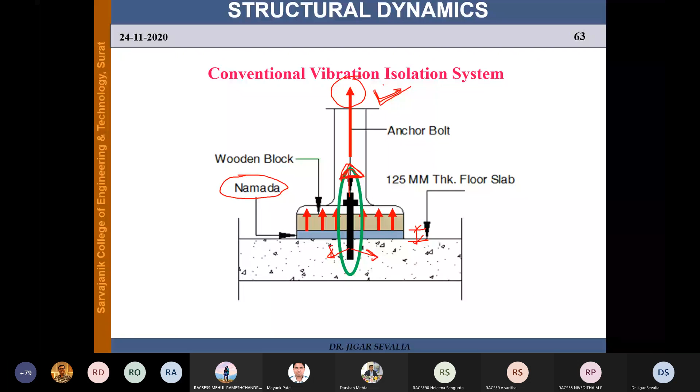So this is the conventional vibration isolation system you are able to see, and this is not at all useful to you. So this is what I wanted to explain to you. Now, one more question, one more complaint.

A complaint submitted by client to me: does the condition of soil matter, the condition on which the building is resting? It matters, definitely. Let me share one experience again.

Some clients were asking me that there is a problem in our building, it is showing a lot of vibrations, and after 2-3 months this complaint became null and void. They said, now the building is performing well. What is the difference between these two? There is a difference of monsoon season. Before monsoon, in January, February, March, they were complaining of vibration, but after monsoon, after June, July, they said they are not feeling any vibration now.

This is because after monsoon, when water percolates into the soil, it reduces the stiffness of the soil, and when stiffness reduces, frequency will change, because the frequency equation is 1/2π√(K/m). So if stiffness changes, your frequency will change. Your building will get separated from the machine frequency, and you won't feel any vibration.

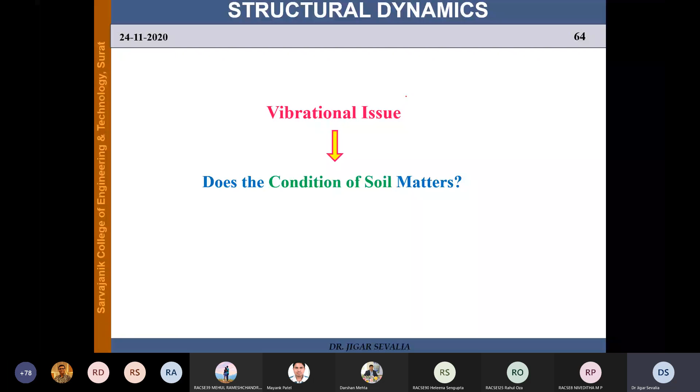So this automatic removal of the situation also occurs many times because of moisture condition. Yes, seasonal changes in the soil affect the vibration. Increase in soil moisture decreases soil stiffness, and in turn causes reduction in natural frequency of the structure founded on the soil. That is one experience shared by the client.

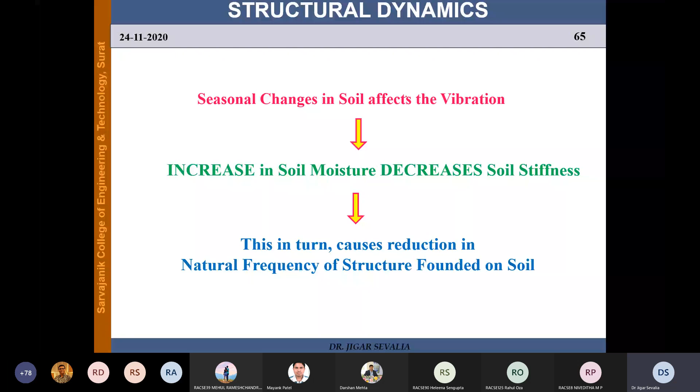But we should not wait for this moisture condition; we have to remove the resonance condition permanently. So this is a layer I didn't add earlier because it makes your analysis more complicated - this is forward and backward motion of the lay, moving forward and backward, 0 to 180 and 180 to...

You can analyze the building further, running so many analysis files. So this is the effect of phase angle.

Frankly, I have not performed this analysis, so if you want to study further, you can extend the study by considering different phase angles also - that is the phi component. In my study, my students considered it as 0.

So this is the layer of effect of the phase angle.